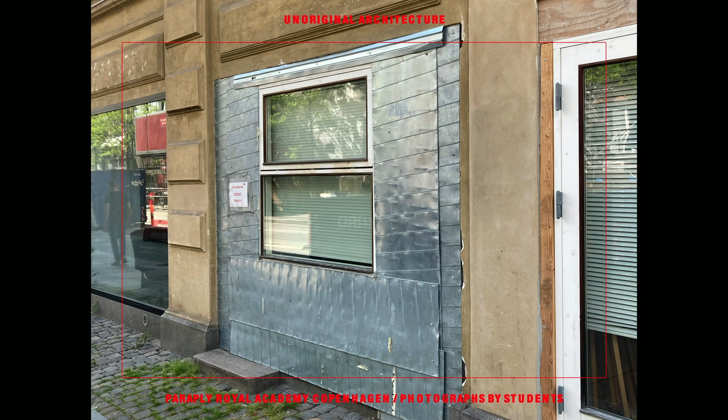In our practice, we are interested in the commonplace, in the everyday. Everyday architecture can be seen as the direct result of the conjunction between human needs and economic factors. We are interested in the prevalence of its construction over its composition, in understanding its architecture as the physical result of a daily temporary utopia.

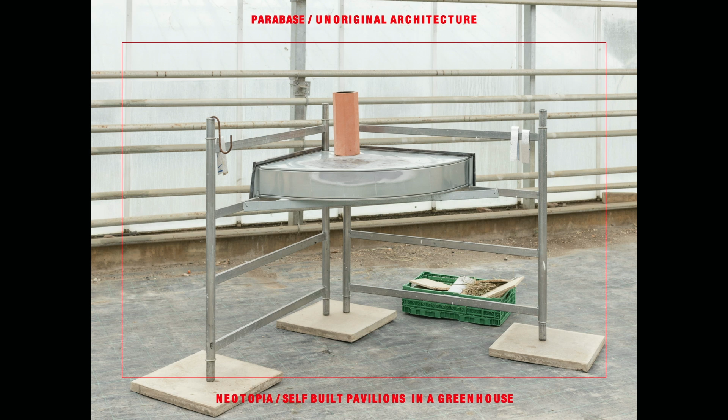These peripheral architectures are usually free from the mediation of architects, and sometimes even free from the control of the legislative power, a condition of contemporaneity that we try to explore and survey with our students.

As we learned during our research on Quaderns, when directed by Josep Lluís Mateo in the late 80s, the magazine also dug into the notion of the everyday and the periphery in a productive way.

Not only physically, but also metaphorically, like in this photograph by Walker Evans, an emblematic one that appeared published in the magazine. We also saw this terrain vague as a fertile ground, a terrain where time is suspended, a place where we can find abandonment or processes in formation, constructions still unfinished, almost like inverse ruins.

With the concept of the new narrative, Mateo borrowed a term from postmodernism and gave it a new meaning.

His declared interest was in the vulgarity of everyday life and the dirt of the real. Together with the periphery, he thus defined the place where new realities brewed, filtered by artificial discourses.

Along with Mateo, architects like Marcel Meili, Hans Kollhoff, Roger Diener, Jacques Herzog, and Pierre de Meuron tried to articulate a discourse through Quaderns in order to escape from the reigning postmodernism, focusing their attention on the periphery, the banal, the commonplace, the prosaic everyday.

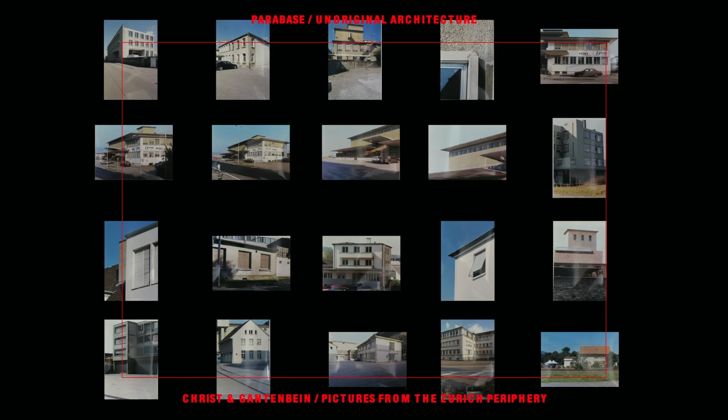Other architects, even younger, readers of that magazine, among them Christoph Gantenbein, Emmanuel Christ, Jan de Vylder, Philippe Ursprung, Sergison Bates, and Caruso St John, were influenced by those articles.

In turn, if history is like a pendulum, by tracing these hidden affinities, we also understood that architecture can simply emerge from a subjective observation of the world around us.

Surveying the everyday is not a stylistic research, but rather a way to challenge established relationships of knowledge by admiring the beauty of everyday buildings and popular intelligence.

Learning from the everyday can be also seen as a shared tradition in architectural modernity, if not as the very condition of architecture, one that gives shape and meaning to our environment.

Just as Boris Groys points out when stating that a contemporary work is relevant and therefore worthy of surviving, when it brings into contact the world of high culture and that of low or popular culture.

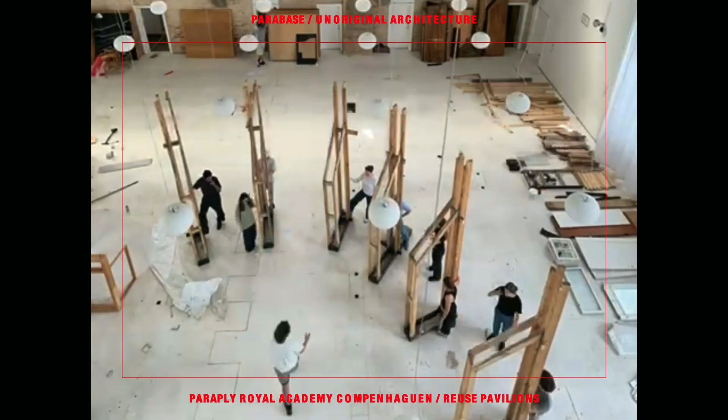In the everyday, circularity is just a natural, pragmatic choice. Nevertheless, it ultimately reveals that buildings are the material evidence of a social and economic history and cannot be understood as autonomous forms. What we call waste shows exactly how contemporary industrial production processes work.

As architects, we can question the notion of waste, or the systems of assigning value in our society, by reusing materials as components.

These components, once alienated, have value beyond the purpose for which they were originally created. We believe that creation is an exercise of appropriation of the residues left behind by others.

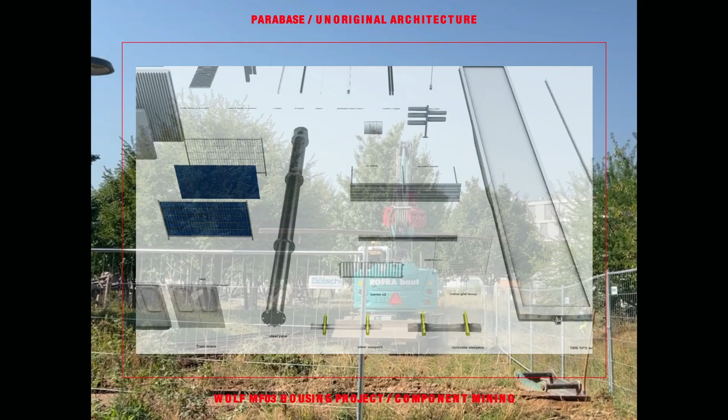We help ourselves with the notions of ready-made and objet trouvé, not only as a creative tool, but also as a political one that questions modes of production, established economic logics, and power relationships in our societies.

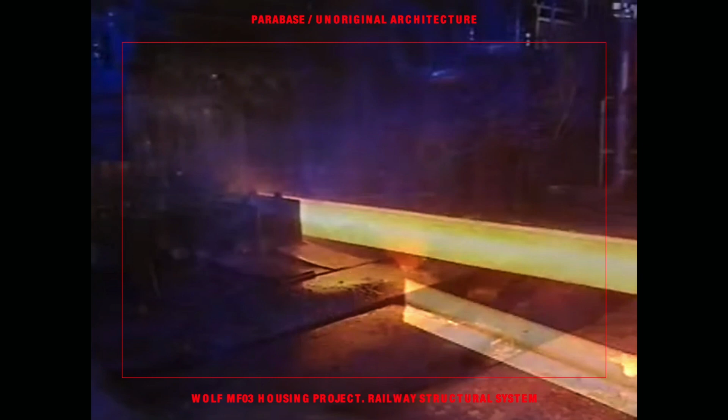Nowadays, it is nearly impossible to identify the real cost of things. No correlation can be made between material and capital flows, such a misalliance becomes even more pronounced when trying to measure not only waste, but also the value of carbon or the value of repair.

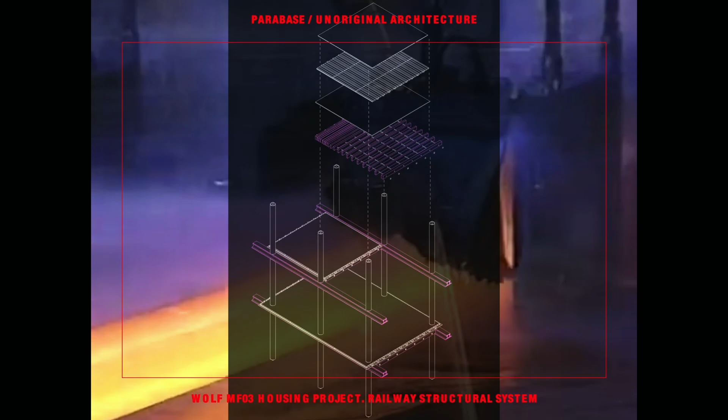Starting from the structural module, we later extrapolated the fragment to the whole volume given by the master plan of Christ & Gantenbein. Post-stressed concrete cores placed on the north facade act as bracing elements. In plan, the circulation cores are alternated with bathrooms and kitchens.

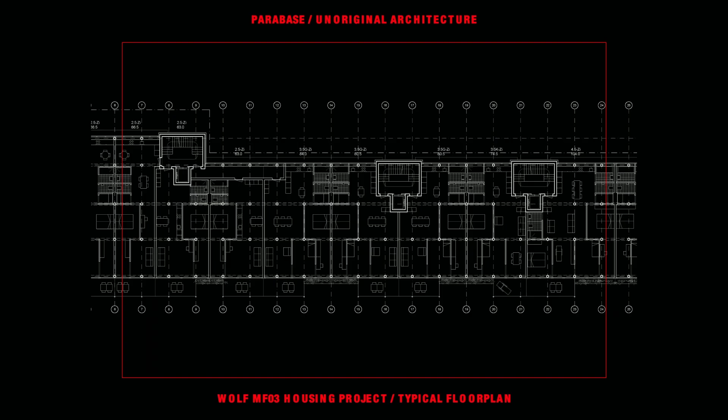Walls slide along the axis of the railways to generate different layouts, creating diagonal views from north to south and double circulations. The floor plan explores the idea of living in a deep floor plan, introducing density as a sustainability asset.

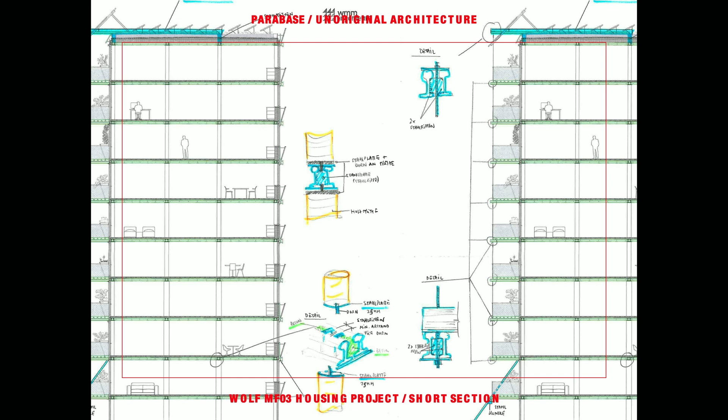The reused metal railways are always connected in pairs in order to perform structurally. From the outside, the project has two very distinct facades. The north one has a closed character, protecting the apartments from the noise of the highway and the potential chemical explosions. On the contrary, the south facade opens up to the protected communal courtyard.

The same inclined acoustic panels act here as planting pods. By reusing multiple elements from the site, the project aims to maintain the historical, cultural, and material value of the Wolf areal in Basel, while giving an answer to the future development of the place.

The building envelope is kept as compact as possible, avoiding any kind of thermal bridges. The balconies, also made with reused metal sleepers, are hung from a system of reused railways placed on the roof.

Understanding CO2 as a currency in its own right might finally force us to not only align monetary and carbon values, but most importantly, to defossilize construction.

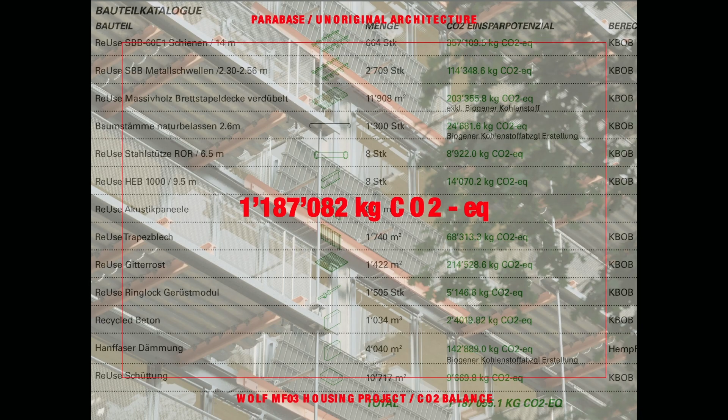This way, architecture can offer an alternative to the usual order of things, bypassing the logic of capitalist axioms. We believe that by challenging these axioms, we are also able to question not only conventions, norms, and established models, but also other notions embedded in architecture, like beauty.

As Paul B. Preciado puts it, beauty is disgusting.

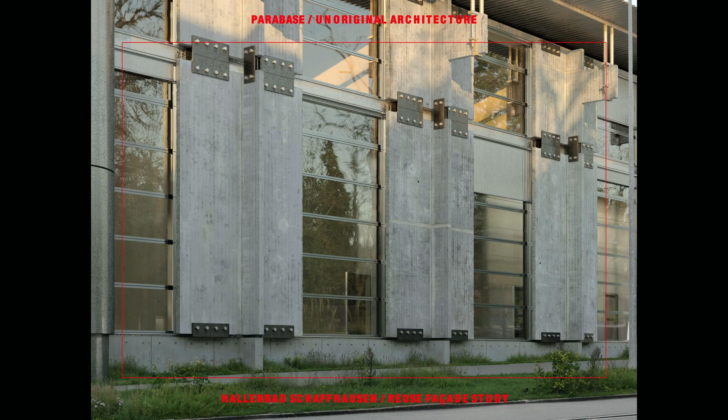Capitalism is the aestheticization of evil. That is why what we call ugly is beautiful and what we consider beautiful is ugly. Beauty is the aestheticization of domination, a form of the political closure of our perceptual and cognitive system. Beauty is the continuation of war by other means.

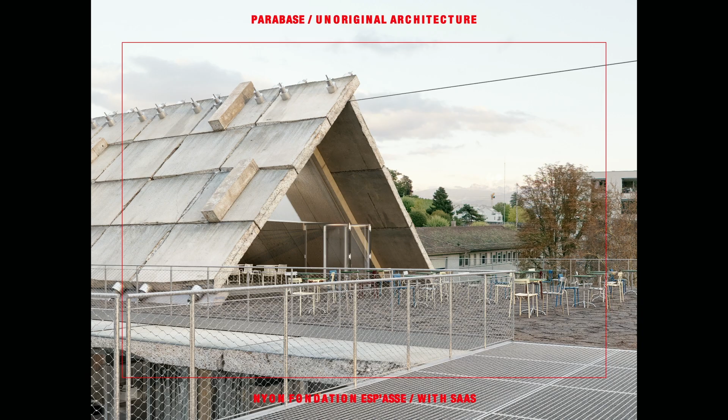Only the encounter with our true organic and therefore mortal nature, forever imperfect, vulnerable, and progressively marred, can paradoxically save us from the aesthetics of global capitalism.

For us, starting to design from materials and components is also a way of destroying the idealized image of buildings. Both in our practice and at university, we like to start designing from construction techniques, details, structural principles, or fragments. The choice of construction materials is often the founding principle of this process.

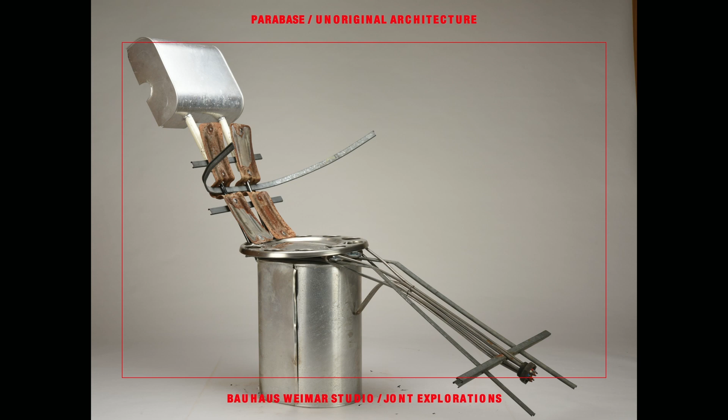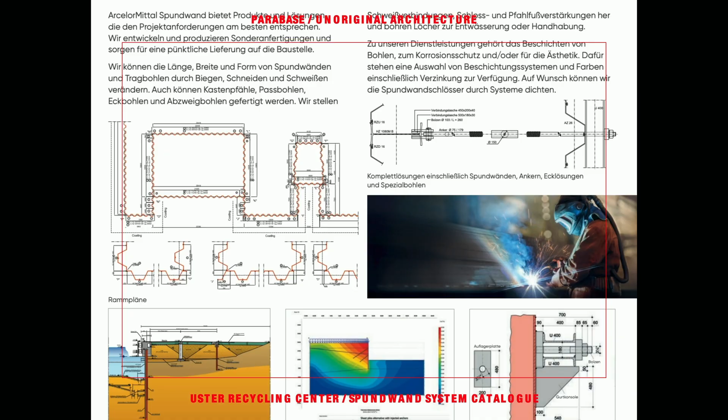We select components that have been bought, handled, used, abused, and discarded. The chosen industrial objects that have been produced, processed, and discarded refer many times to the excesses of the capitalist mode of production. Transforming and assembling these existing components, we aim to challenge conventions in construction.

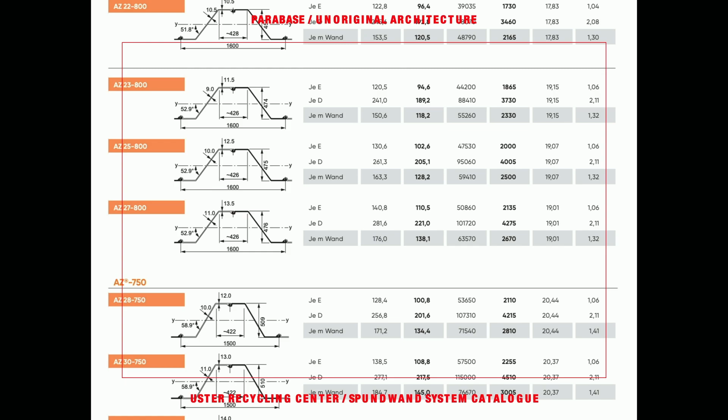Many times, we start our project by elaborating a catalog that sets up the boundaries within which to operate. If Ezra Pound described literature as language charged with meaning to the utmost possible degree, we like to think about architecture as construction charged with meaning to the utmost possible degree.

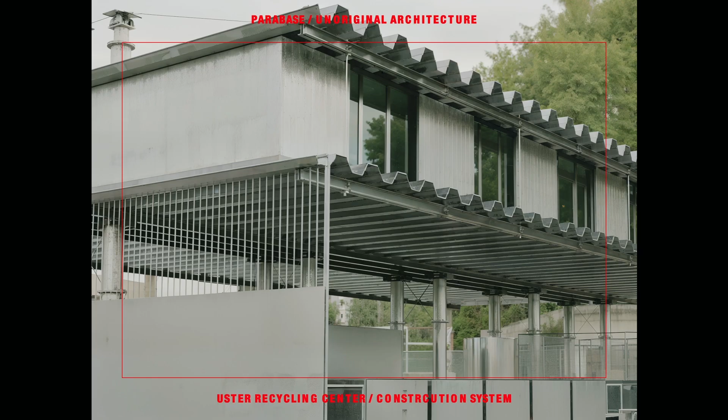Through the physics of construction and rigor, new architectural discourses could be unleashed. If postmodernism promoted an immaterial architecture based on authorship, other narratives could be constituted around the physical and the concrete. Social distances, megajoules per kilogram of embodied energy, thermal transmittances, carbon dioxide emitted per kilogram of construction, weight per square meter, particle concentrations, and volatile organic compounds help us turn the postmodern idea of authorship into a futile ambition.

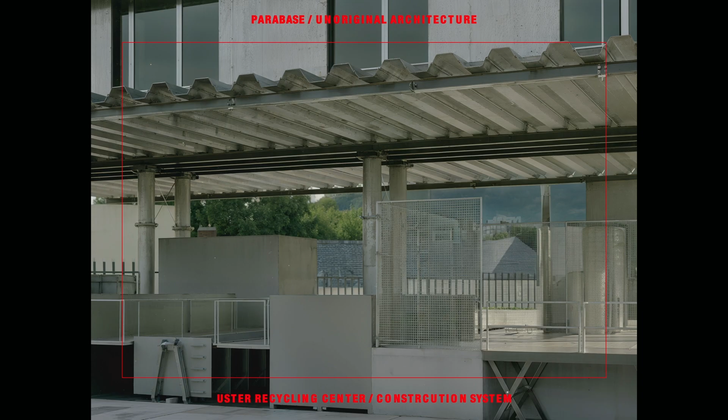In our project for the recycling center in Uster, we decided to reuse the sheet pile as a structural component, mainly because of its availability, its resistance, its dry construction, its capability of dealing with water, and its ease of disassembly. The sheet pile is a component already embedded in a material cycle.

This way, if their lifespan is around 100 years, we just added a small detour of 20 in order to fulfill the requirements of the future disassembly of the building. After these 20 years of use, the sheet pile could go back to its original purpose.

In the perimeter of the plot, the sheet pile was used conventionally to contain the soil, allowing vehicles to move freely. In order not to modify any component, the elevator and the staircase were placed next to the building, envisioning in turn its potential to also be standard reuse components.

In the recycling center, the sheet pile was reused by just turning it 90 degrees from its original position: walls as slabs, horizontal bracing as columns.

The project also envisioned a system of shearing layers, reading the diverse lifespans of each individual component conforming the building. The foundations were thought as a prefabricated system, easily reversible and reused from a crane counterweight.

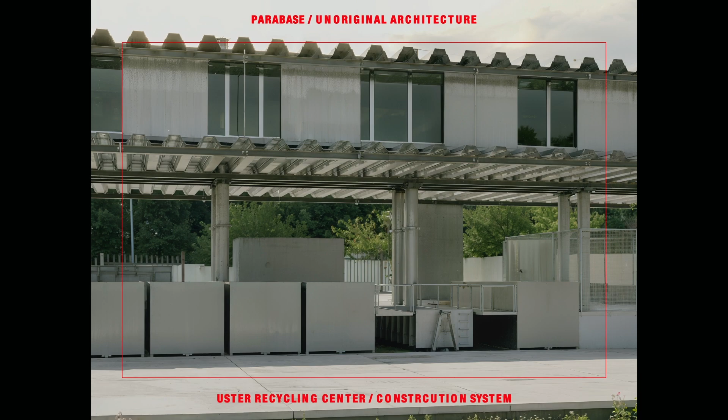The ground floor is therefore liberated for vehicles and objects, the main actors of this specific architecture. Humans, this time, are relegated to a secondary role.

The structural principle is clear and direct, concentrating compression forces in the center while tension cables hold the overhangs of the sheet piles on the edges. This strategy also allowed us to minimize the amount of foundations, a condition especially relevant given the temporary character of the building.

The consideration of the future reusability of building components also requires a new perspective in the design process that goes beyond the current project. As architects, we are always part of a larger process that others have already contributed to and that others will still take forward.

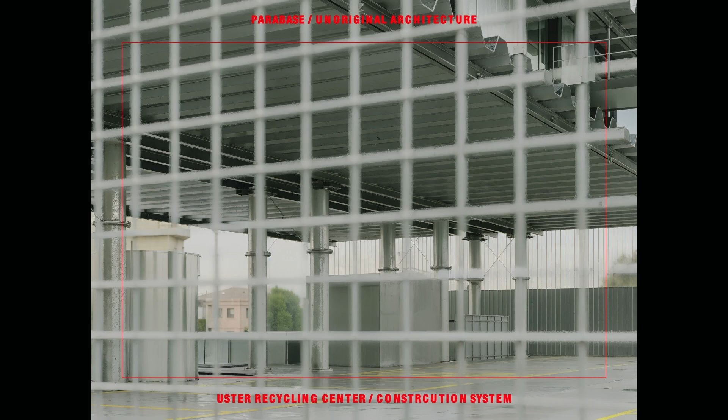This simultaneous presence of disparate temporalities does not deny the linear course of time, but renders it more complex and elusive. It shows that the experience of time is determined not only by individual inclinations, but even more by cultural variables. We try to embrace heterotopia and heterochrony in our projects.

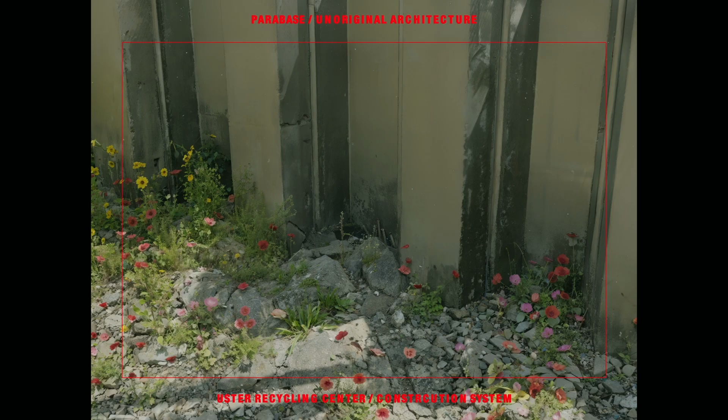Multiple times and multiple spaces converge in a building without clear lineage, without deep roots, and without nostalgia, as a positive vision of complexity and chaos. If according to the SIA our life expectancy is higher than that of the buildings we design, why can't we understand them just as really slow events?

Like in the example of the housing project in San Bernardino, where we repurposed abandoned ski lift posts. The reuse of elements entails the coexistence of different temporalities, in which historical distance and narrative are continually intertwined. This way, reuse is also an invitation to consider the past as an unstable phenomenon in constant change.

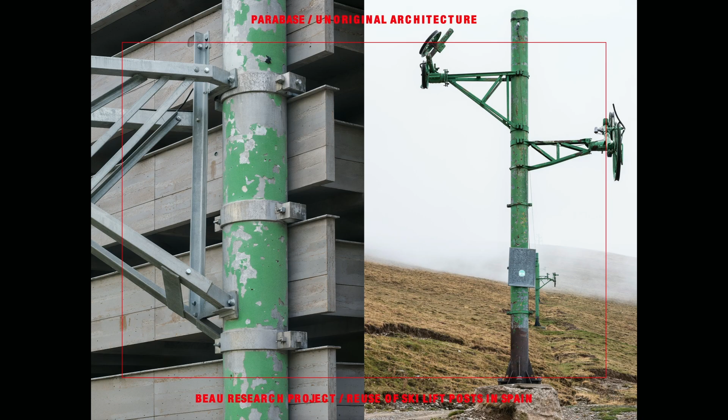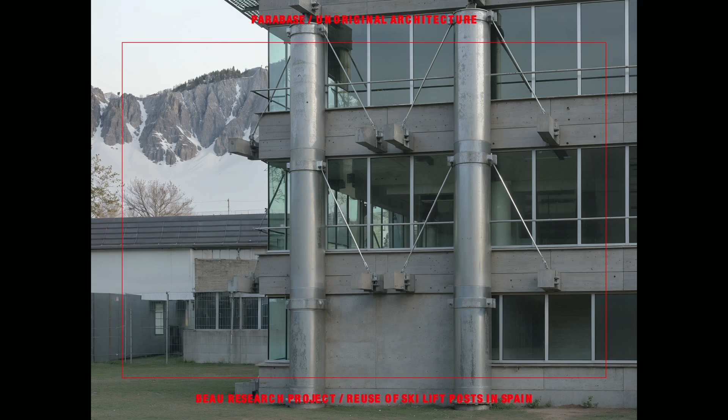Here, the dimension of time evades the sequence of the calendar. It is unstable and can be manipulated and bent by combining spolia, by reactivating ancestors, by comparing events across time, by fabricating memories, by aggregating segments of different temporalities and putting them in tension with each other. The act of reuse creates an interobjectual network which contains its components but does not coincide with any of them.

It speaks not to the past but to the future. This is perhaps the most extreme case of a recurrent paradox of reuse.

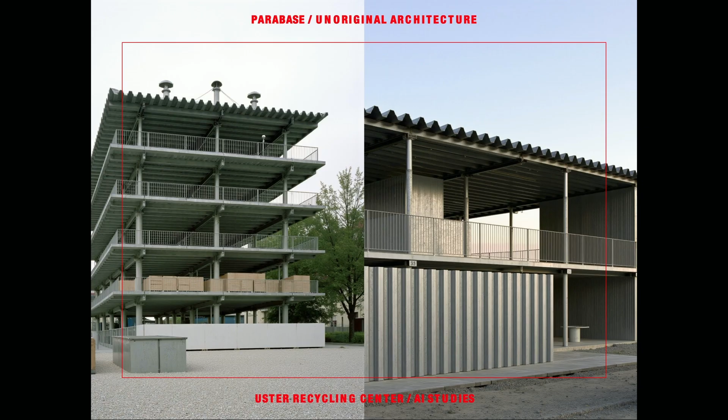It damages existing buildings and yet, in some way, it ensures their preservation. We believe that errors guide evolution. Perfection offers no incentive for improvement. We believe that creativity consists in intuitively taking advantage of these errors for our own benefit, using what lies at the margin, the noise, the residue, the spolia.

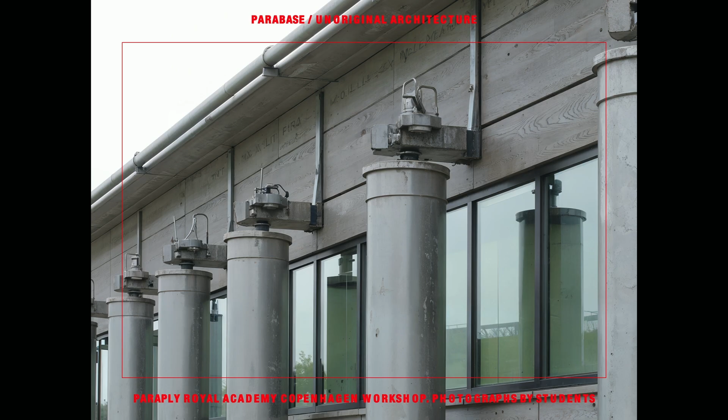Important works have emerged through anomalies, if we understand anomalies as aberrant mutations within a discipline. That anomaly is the error we usually discard. It is there in the outskirts where we often find the DNA of the architecture that interests us.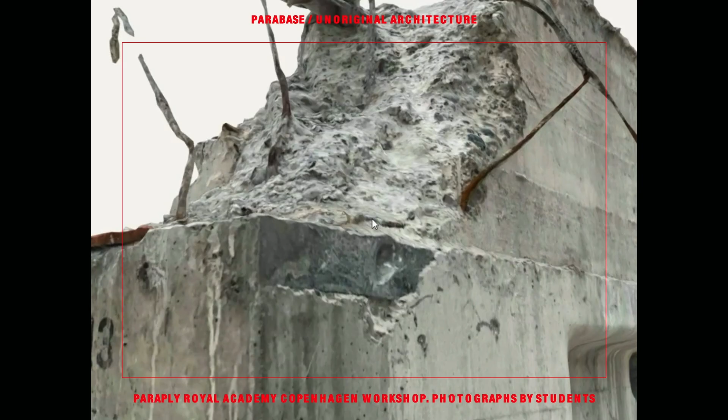In our practice, we are keen to explore the limits of all types of technologies, to shift constantly from the physical to the digital world. There is a particularly interesting error-generating mechanism: appropriationism.

If the insertion of the appropriated component is skillfully applied, it generates a short circuit and the symbolic, canonical, and even semantic order of the original pieces is disrupted. For a few moments, judgment of this new work is suspended, placed in a limbo, in a periphery where the mistake, the error, the lost in translation resonates with the anxiety of influence.

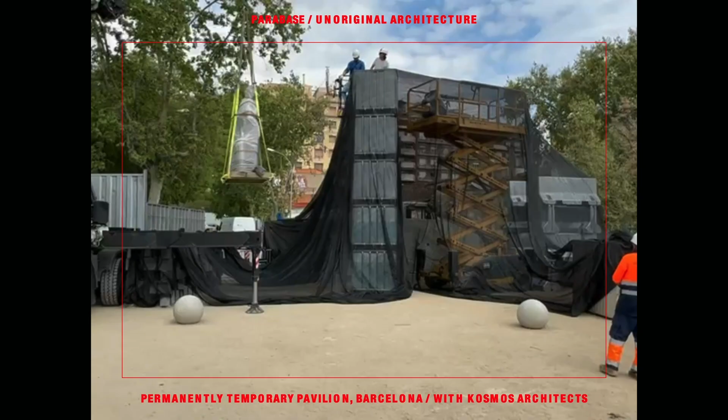Appropriationism is something inherent to culture and to the evolution of knowledge. We are interested in an appropriation that becomes explicit and is used as a gesture that openly reveals its own technique, as a method for creating works. As Kenneth Goldsmith puts it, context is the new content.

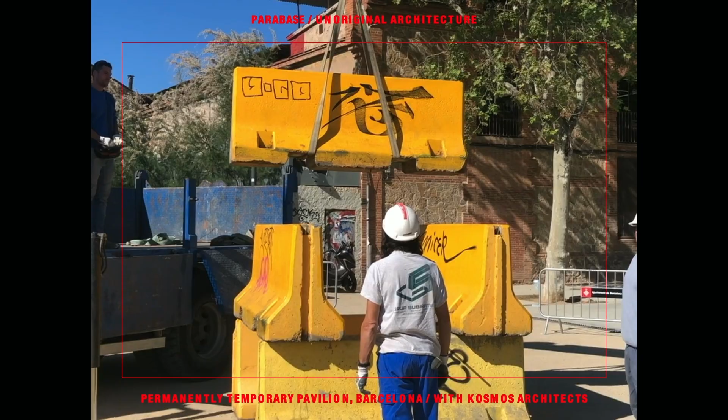Introducing the notions of ready-made, as found, objet trouvé, copy, sample, appropriation, displacement, decontextualization, or bootlegging, we believe that we can make reuse resonate not only with ideas firmly rooted in the history of architecture, but maybe more interestingly, with other contemporary cultural practices. The same that we reject and discard, we adore seeing on the pedestal.

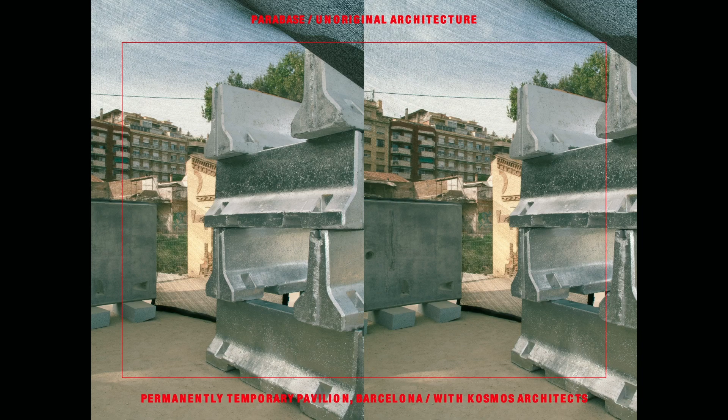As on Sundays, things feel different. Through these notions, components tend to open up in ways their functionality wouldn't otherwise allow, stretching, balancing, and piling one on top of the other, tilted on their side, hung up, or shoved over. We aim to explore their limits, unbalancing the fixity of values.

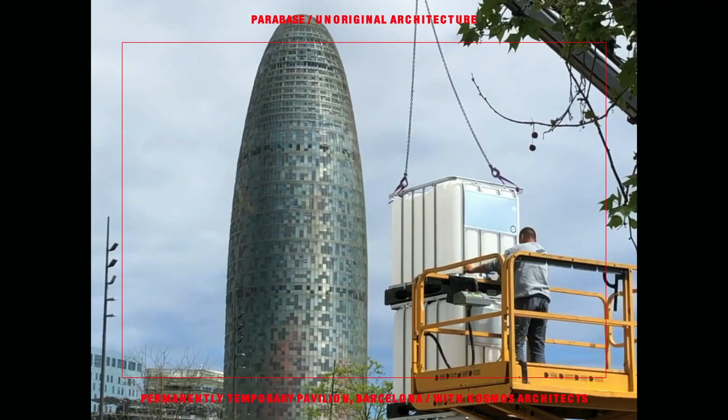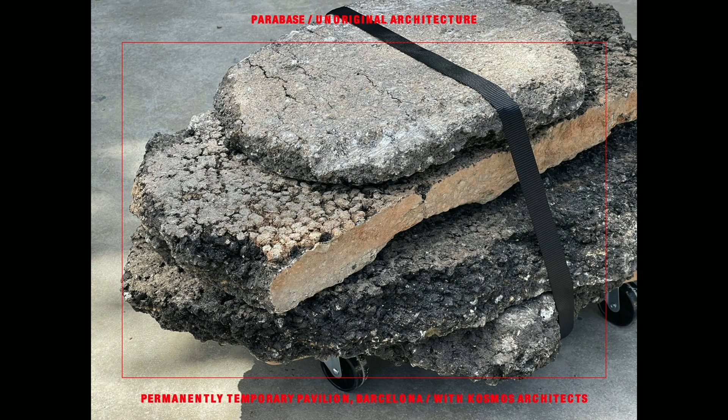Misuse does not happen by invitation. It happens when there is a desire to release that potential, to discern an alternative route, to bend things to see what they are made of. It is a certain willingness to be perverse, to deviate from the straight path, the right path.

This way, we can see the creative act as nothing more than taking material that already exists, appropriating it, and introducing a mutation. To create is to relate, something very simple and very difficult.

We see architectural production inserting our own work into that of others, helping to abolish the traditional distinction between production and consumption, creation and copy, ready-made and original work. It is no longer about shaping a form from raw material, but about working with objects already circulating in the world, already informed by others.

The notion of originality, and even of creation, slowly blurred within this new cultural landscape, shaped by the figures of the DJ, the programmer, or the curator. All tasked with selecting objects and embedding them in new specific contexts.

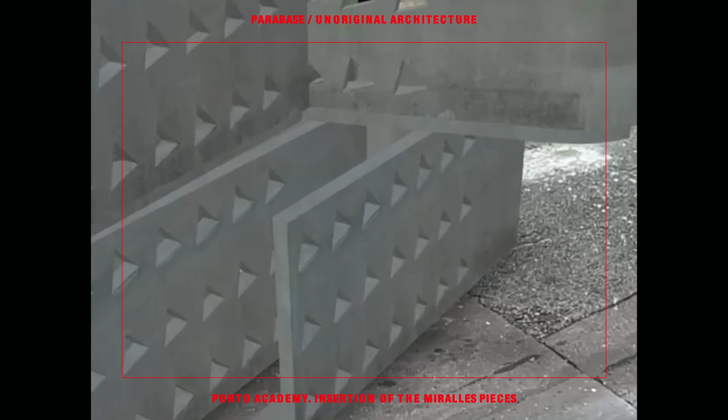In the current global context of climate emergency and the multi-organ failure of the capitalist system, this new paradigm presents a series of opportunities that architects can harness to contribute to a truly sustainable and circular cultural practice. It is no longer about the tabula rasa, but rather about finding a way to insert ourselves in the countless flows of capitalist production, even while calling them into question.

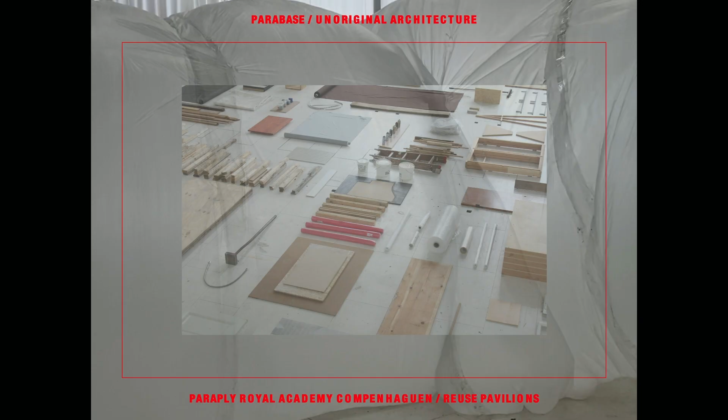Breaking with the modernist ideology, the question is no longer what new thing can be done, but rather what can be done with, or how can we produce singularity? How can we create meaning from that chaotic mass of objects, proper names, and references that constitute our everyday environment?

The creation of architecture must move within a universe of pre-existing forms and objects, of already broadcast signals, of buildings already constructed, of paths already traced by our predecessors.

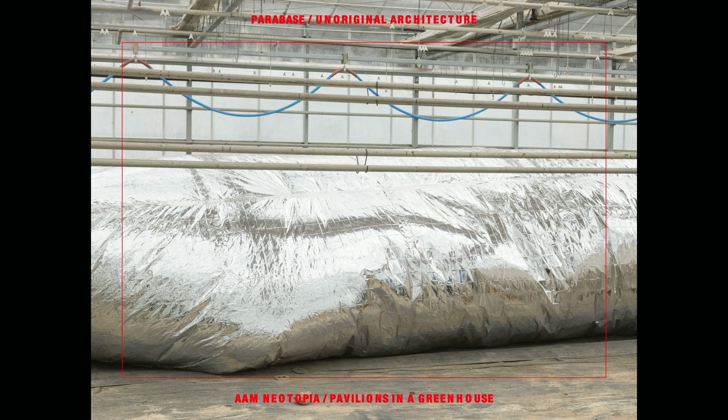This recycling of sounds, images, forms, or materials entails an incessant navigation through cultural history, a navigation that eventually becomes the very subject of the architectural practice. We don't think architecture is only about inscribing a personal work, subject to the reinscription of originality, but rather about reactivating the history of architecture over and over again, about using and repairing what has already been built. Because architecture can only be seen as a collective and anonymous work, of which, in the end, only what has been built in the name of all will remain.

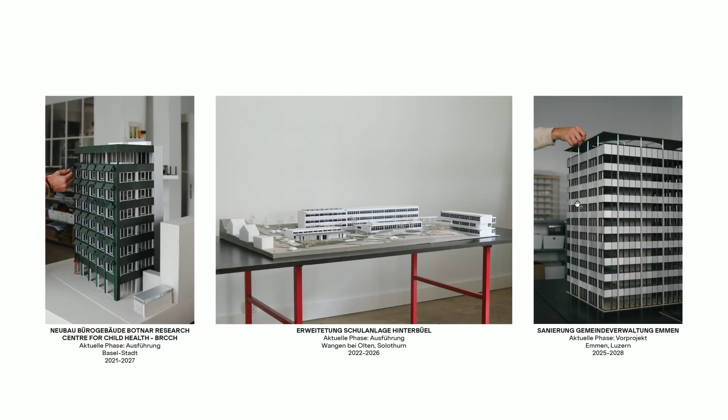Here is Botnar Research Centre for Child Health in the center of Basel. The Baustart was actually 2 weeks ago. In the middle is a school and a kindergarten in Wangen bei Olten that should be finished next year. And the last project here is a renovation of an administration building in the suburb of Luzern in Emmen, which is our fourth project.

And we start to envision what are actually the factors that make our architecture be how it is. And for us, we do think that we have a certain pragmatic vision for the architecture, because of all the big urges, the difficulties that come from the development of technology, or AIs, and who knows even more what's coming with quantum computing and so on. So that we really need ways of finding architecture in a very more simple way.

We do think that our architecture can be resumed in four values. We classify them as situatedness, where we really care about the context and try to preserve the history. Systematization, on really trying to figure out with the program a very clear way of dividing everything. The economy of means on the construction, which we think is very important together with the systematization. And then the exception, because if we would only be doing systems, then we would be machines, right? So we are trying to bring the human factor in at the end with a certain exception.

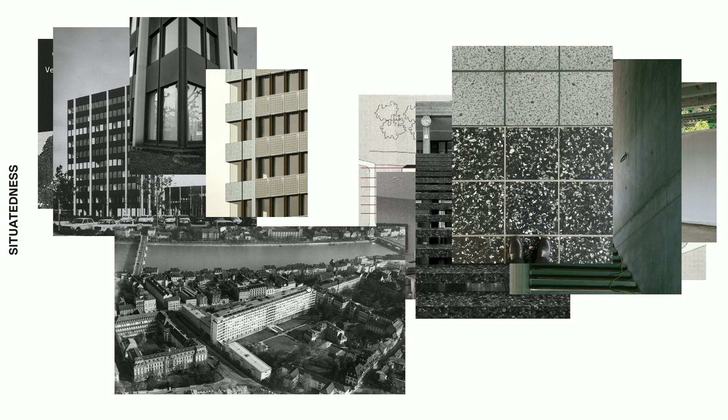Here in Basel, another approach: we are at the University Campus Spital, where this big building faces the historic fabric or pattern of the historic city. The challenge was to react to this particular situation of the city, with single objects versus the old fabric.

Therefore our volume proposes a differentiated site. On one side we align and repeat the historic fabric. On the other, we twist or bend with a diagonal facade that echoes or dialogues with the single objects of the University Campus in Basel.

Second chapter, different value: systematization. Same project, this corner building in Basel, where we place not the structure of the building, but the circulation, the stair zone, the sanitary facilities—everything in one row, one core, in order to free up open space. Quite a simple concept for office space, but one that offers flexibility.

But with a raster that can be transformed also into a single office building, and with our ideal floor plan that could, in the future, be transformed into housing if necessary.

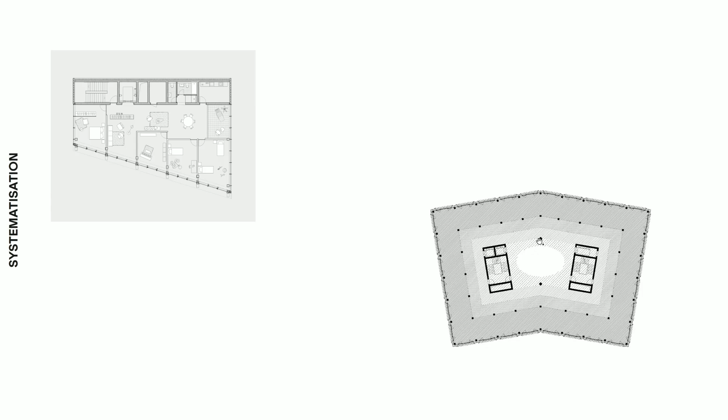Another building, this administration building in Romanshorn, also in Switzerland, where we reuse the typology of the atrium to propose a building where the most public part is in the center and the more private part is in the periphery. With this onion floor plan, we can solve the different types of access and privacy needed for this type of building, making the floor plan more concrete.

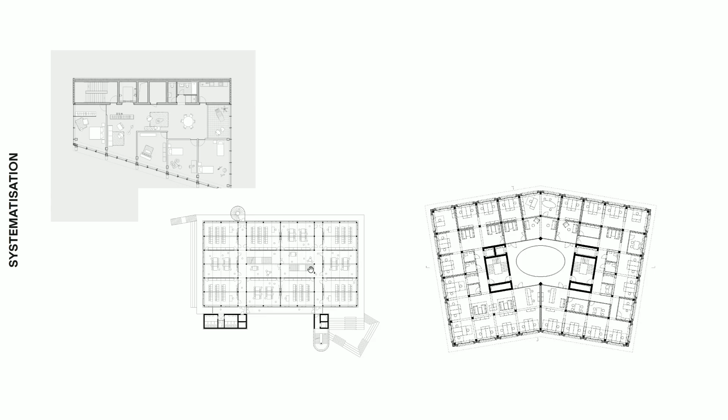For example, this school in Rapperswil-Jona, where the client needed several configurations of space, we offer a system that can be divided into clusters, recombined into big or small spaces alternatively, according to need. Coming back to the school in Olten, here the system was kind of given in a way, or in a simple way, with always these stairs and two rooms on the side.

This module is repeated a second time, and on the ground floor, corridors link all these spaces. Then we simply extended this module, which is already flexible and efficient today, and connected it on the ground floor with the kindergarten, offering a clear, simple space that can be transformed over time.

So for a third value: economy of means. For us this is not about austerity, but about clarity—using each material and each structure in a very relevant way. For example, not always wood; we don't think wood is the only material that can be used to reduce CO2. We rather think structures can be further developed to avoid extra material and so on.

So for us, hybrid structures are very much looked into, because then we can also promote things like modularity and prefabrication. But also, what's very important for us—funny enough—is not just giving circulation to people, but also having the structure itself provide for the whole technical distribution.

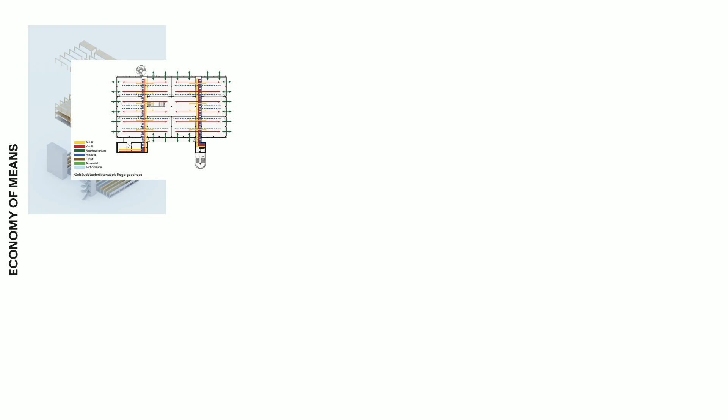Another way that we think structures can be looked at in even more detail is, for example, in this office proposal, where we give also a grid on the floor, where certain areas of the floor could be removed so that you could add walls with certain high acoustic requirements.

Or, for example, when we look at things like facade modularity, we try to use this modularity as a technical approach in the division of each module, and make it an ornament in the facade, bringing the technical point of view as an architectural element.

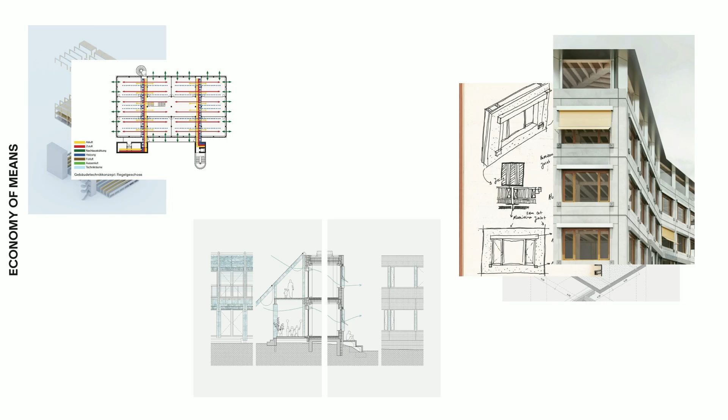And here is another example where we thought about modularity at a bigger level, where we had a typology of a very long house - it was actually a school, but a long house typology, let's say - that we could develop as fully modular.

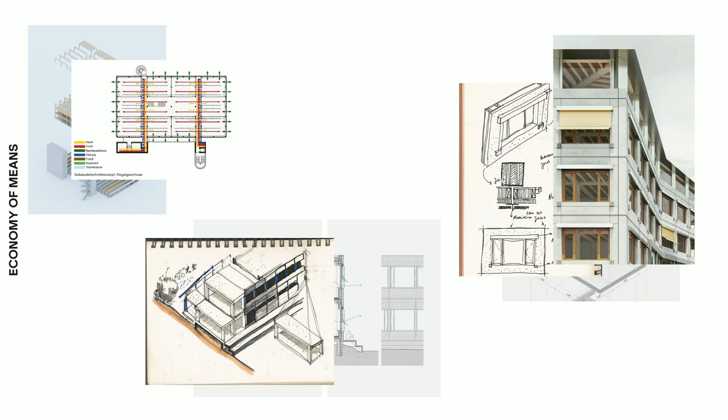We thought of bringing each time the full element of the room, and in order to take away this modularity expression that is very present today, we put a facade as the single element that represents it. For this project, one side mimics the existing school facade, and the other creates a cursive which is more kids friendly.

For us, modularity is something we could already see reducing the span of the construction site in our projects, and we will continue preserving it. Sometimes this modularity already exists in some projects we work on, and especially when it works pretty well, we try to keep it.

So again, on this other project that Arthur already mentioned, we hope that we can reuse the existing panels and only remove the current paint that it has.

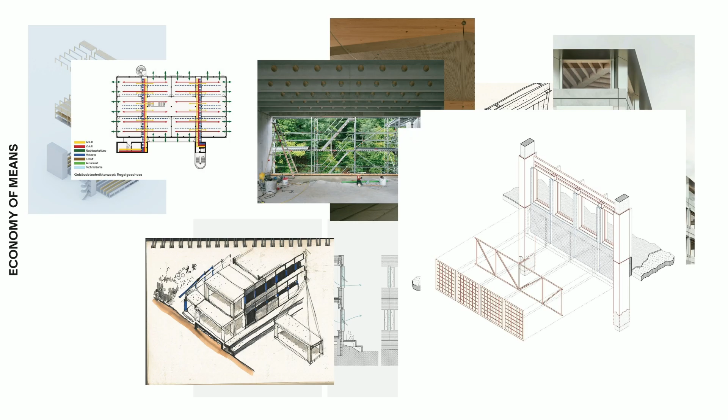But when the client has different needs, like photovoltaics, we think of photovoltaics more as an add-on element, and it becomes part of the ornament of the architecture of the building. In this project, we just add a roof, which changes the facade expression without needing to change the original architecture of the building. This roof, besides giving a terrace area for people, also provides for more photovoltaics.

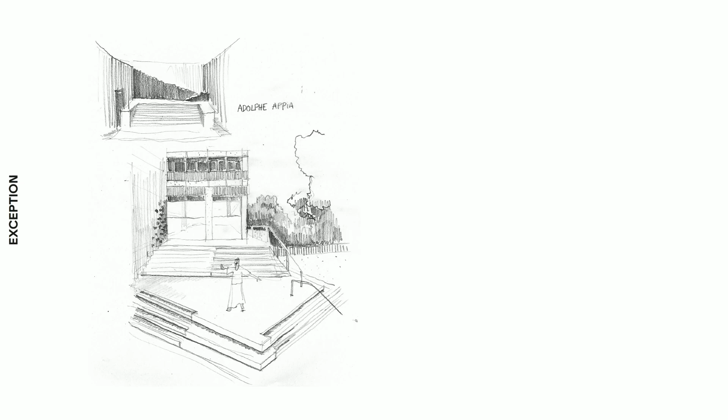And then, like we said, exception is also very important for us, so that nothing becomes too systematic. We always give special attention to this exception at the end.

In this case, it was a school elevated on a hors parterre, and we thought that perhaps the most important point of this system was this entrance situation, where we break and suddenly the whole building opens up to the public. We thought these staircases could also be used as a classroom area outside, or where the students meet before going to school.

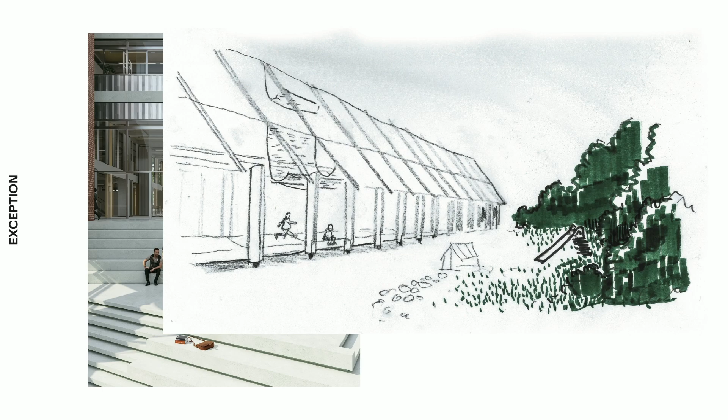Or, for example, again on the long house typology, where we try to think of the garden as the element that breaks the rigidness of the repetitive facade, and then we try to visualize it.

Or when they gave us a chance of building a building in Basel, which could have an amazing view, of course - then we put the break room on the last floor, and tried to put all the expression in it with this round meeting room.

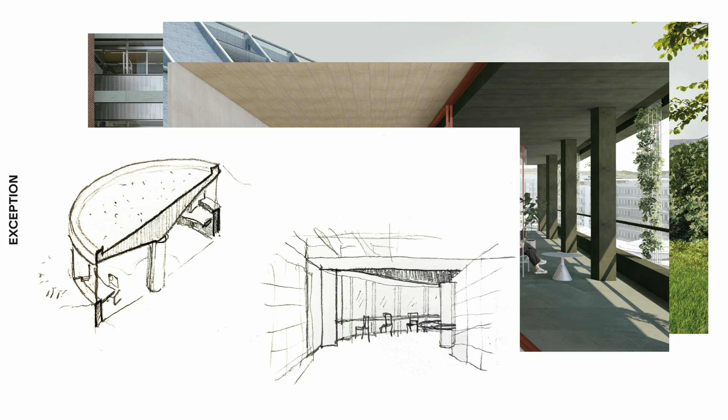Or when we were building the school, and we saw that the library is the most public element, we thought of taking it out of the rigidness that exists today of this orthogonal plan. We create a semicircle, that sticks out of the plan and overlooks the existing forest, which is very beautiful. It was also very nice that the teachers came to us and said, 'I'm really happy with this room and I can't wait to be in it' - this is really a big reward.

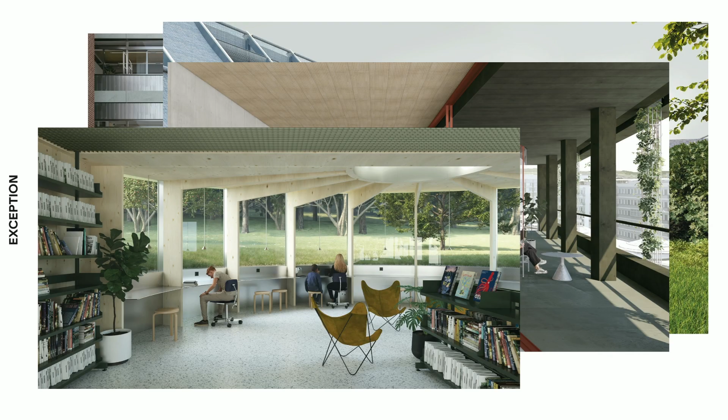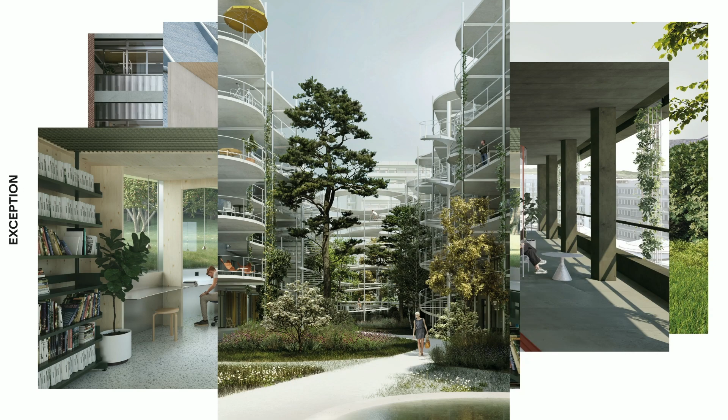Or when we propose a very flexible way of housing in a very rigid and pragmatic approach, but then put all the attention into the circulation that goes and encloses the courtyard between the housing, trying to provide a more human scale - maybe not human scale in this case, but this one is a collaboration with a dear friend, Rafael Caddy.

Or when you already have a project that has an amazing view, and then you think that the only thing you could do is add a roof.

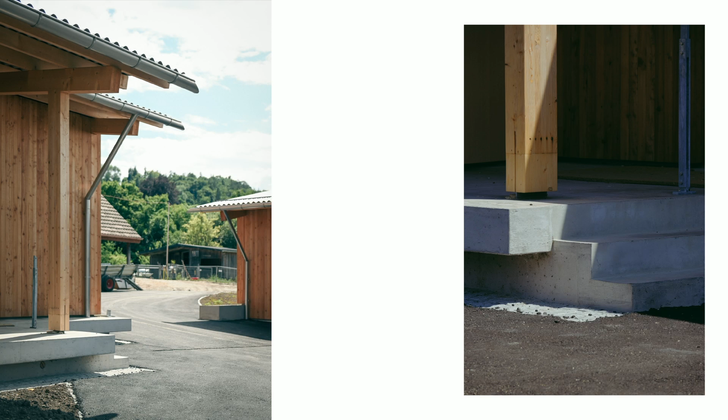Davor wird das Vordach erweitert und wird zur gedeckten Veranda. Ein Übergangsraum zwischen innen und außen entsteht.

Besonders spannend finden wir seinen Ansatz von Hightech ohne komplizierte Gebäudetechnik, wie ausladende Dächer, natürliche Belüftung und Becken als Wasserspeicher im Brandfall. So ein Hightech-Low-Tech, das wir ganz spannend finden.

Dann kommen wir zu unserem zweiten Projekt, nach Basel. Das ist das Projekt zur Erweiterung für den Kindergarten am Langen Läuferweg in Riehen. Auch bei diesem Projekt wird der Bestand, die Ausgangslage, der bestehende Kindergarten von Rasser und Vadi, soll erweitert werden um je einen Gruppenraum, und eine dritte Einheit soll auf dem Areal Platz finden.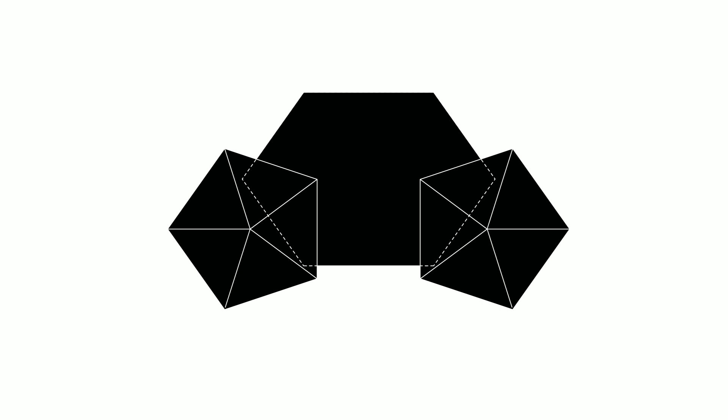Rasser und Vadi kennt man wahrscheinlich vom Domushaus. Der Kindergarten hier in Riehen war eins von ihren ersten Projekten. Das bestehende Gebäude selbst funktioniert dabei schon eigentlich wie ein Ensemble. Es setzt sich zusammen aus unterschiedlichen geometrischen Grundformen: zwei pentagonale Zeltdächer mit den Haupträumen, und dazwischen baut die Nebenräume mit dem Flachdach als ein Hexagon.

Um Raum für das zusätzliche Programm zu schaffen, skalieren wir dieses Hexagon zu diesem untergeordneten Bau. So entsteht eine neue Raumschicht im Süden. Man sieht es hier, da sind neu die Garderoben drin. Die Haupträume bleiben bestehen, wie sie heute sind, werden nur pinselsaniert.

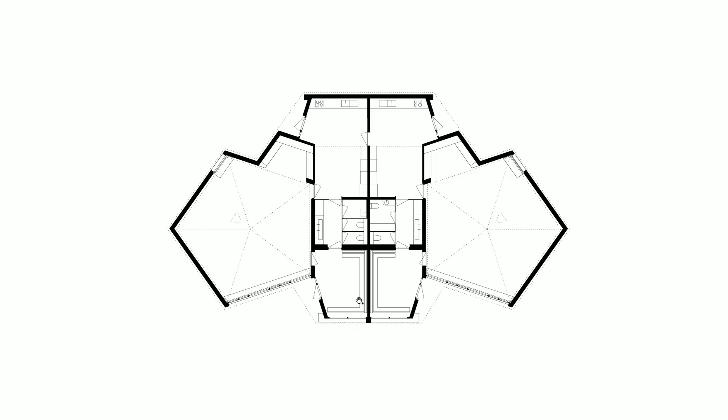Und im Zwischenraum gibt es größere Eingriffe, der wird neu organisiert mit den WCs und dem Gruppenraum nach Norden, und die Eingänge nach Süden verlegt. So kann der Doppelkindergarten weiter als Doppelkindergarten funktionieren, wie er ursprünglich geplant war.

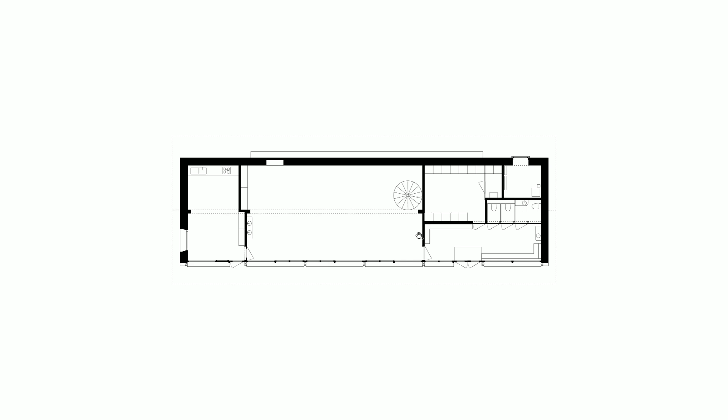Dann kommen wir ins Haus selbst. Ein gemauertes U bildet diesen Rücken zur Schule, eine große Fensterfront öffnet den Innenraum zum Außenraum. Wie im Bestand ist der Zugang zum Kindergarten über den Garten. Garderobe, Hauptraum und Gruppenraum werden über eine Enfilade entlang der Fassade erschlossen.

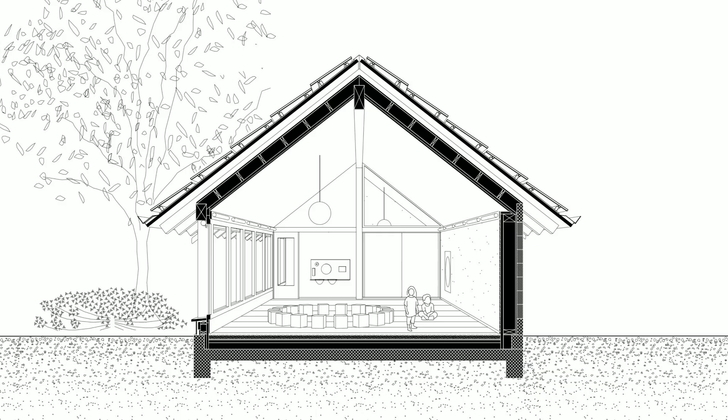Die gemauerte massive Wand aus Lehmsteinen, die außenliegenden Sparren und die Stützen an der Fensterfront bilden ein Exoskelett. So wird eigentlich dieses Tragwerk gleichzeitig auch Fassade. Und wie im Bestand mit den Zeltdächern gibt die äußere Form auch hier im Neubau den inneren Raum vor.

Auf der Mauer aus Lehmsteinen gibt es ein Dach mit Photovoltaikmodulen, Wetterstation und Fühler steuern im Haus eine direkte Lüftung über Fensteröffnungen mit einem Kamineffekt über die Gaube, sieht man hier. So entsteht für uns so ein spannender Kontrast zwischen Low-Tech und High-Tech.